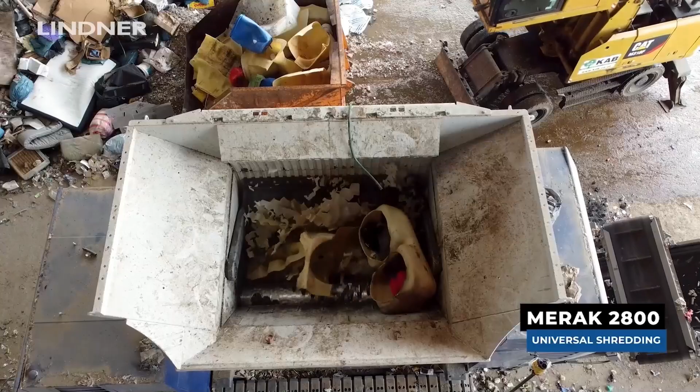What you saw here is our core competence. We are a producer of shredders and complete shredding systems. The company is based in Austria. We produce all our equipment in Austria in 2 facilities. At the moment, we have more than 400 employees worldwide working for us, with several branches also worldwide.

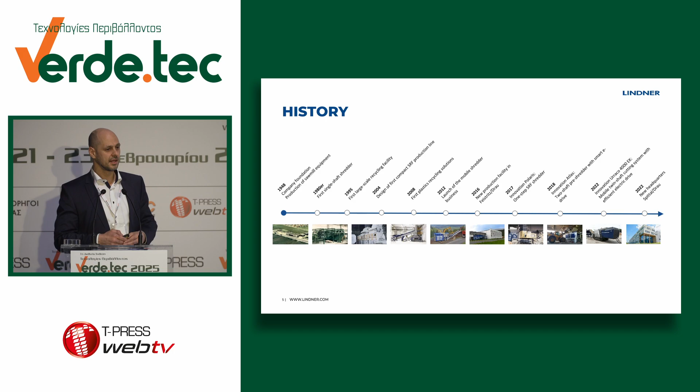We started almost 80 years ago in the wood business. And then we saw in the late 90s that there is a market for waste products, particularly shredders. So that's where we started with our first machine, around 25, 30 years ago. Then we developed also the market in terms of plastic and waste. Now we have several branches, as said, worldwide, where you can see in the US, Europe, of course, and also in Asia. Our vision is, just to summarize it, take the waste and transform it into a valuable fraction.

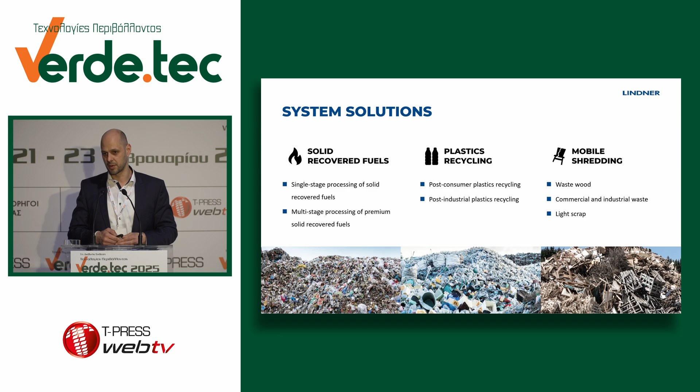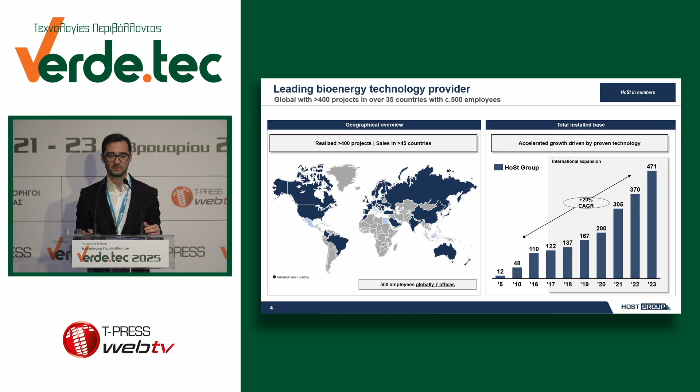The other majority of employees are located in Poland, where we have our manufacturing site. All our equipment is made there, and this helps us always give the best solution on the market. We can monitor all steps of the process and test the machines before delivery on site.

Here we manufacture all the containers, all the skids, all the fabricated piping. We test them and ship globally, from North America, South America, to Australia or Japan, and of course Europe.

This is an overview of the products we have. So as I said, with the brand Bright, we supply the biogas upgrading unit, CO2 liquefaction unit, bio-LNG of course, and CO2 flue gas capture.

This solution is with a specific technology. And in the end, with the brand HyGear, we have the containerized solution for hydrogen production with steam methane reformer or electrolyzer. With the brand Host, we have the anaerobic digestion plant and the biomass waste combustion plants.

As I said, we always have the control room in Enschede for service and maintenance, and local teams for each different country, because although we can monitor everything from there, it's important to have a local presence for maintenance and for relationships with clients.

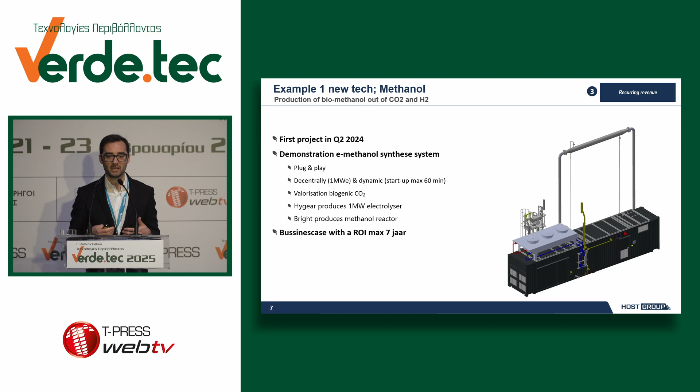For example, this is an innovative solution where we see cooperation between Bright's CO2 recovery units, so we can recover CO2 from the biogas or from flue gases, and mix it with hydrogen produced from an electrolyzer by HyGear to produce another biofuel, methanol, which we see a lot of application for as naval fuel. This is the last slide.

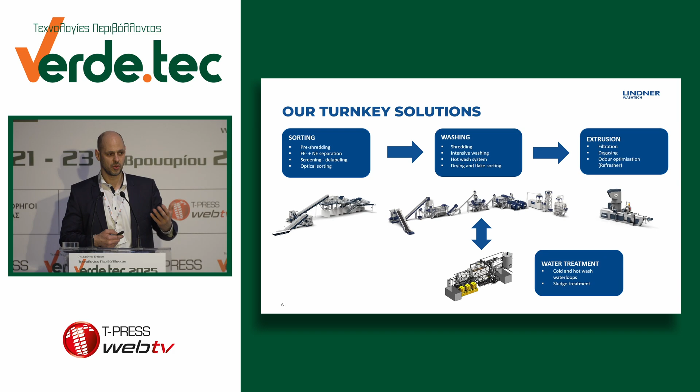And then we go into the shredding, washing, drying, and afterwards we have the extrusion. The water treatment, we have our own partner. There are two ways to use the water - we can use a cold or hot wash system, depending on the requirements.

Now I'm showing you some installations. Important to tell you is that we are active in the post-consumer field. That means the fractions you can see here, we are able to treat, and mostly these fractions are contaminated. So that means HDPE, LDPE, PP packaging, and also PET.

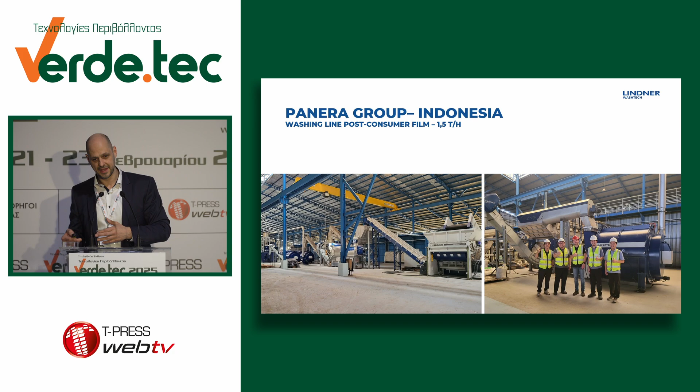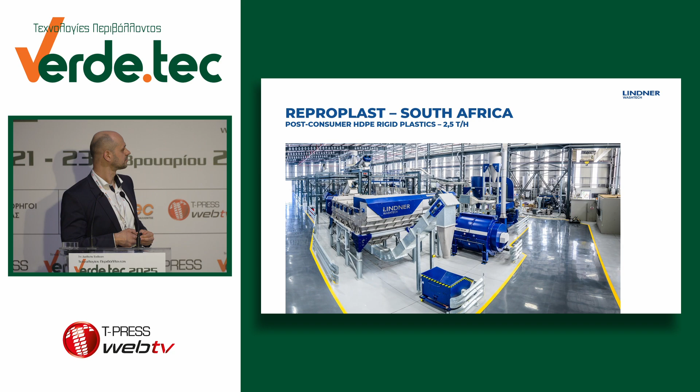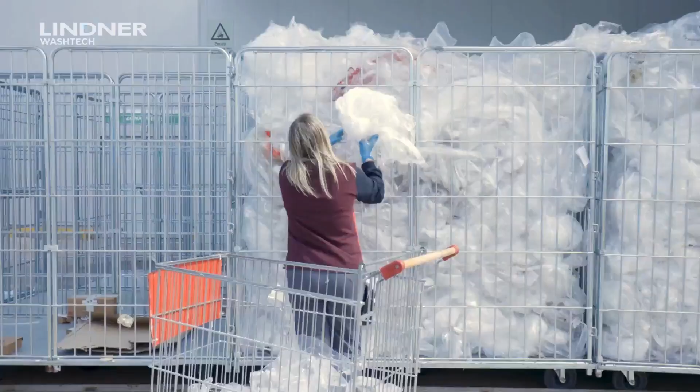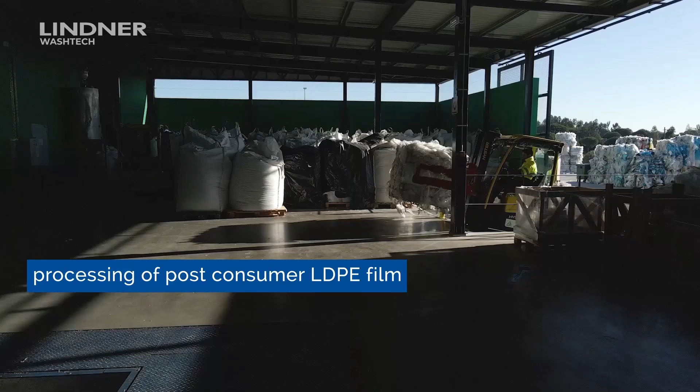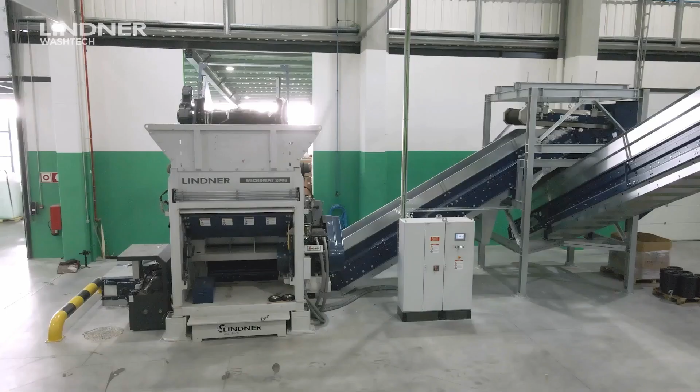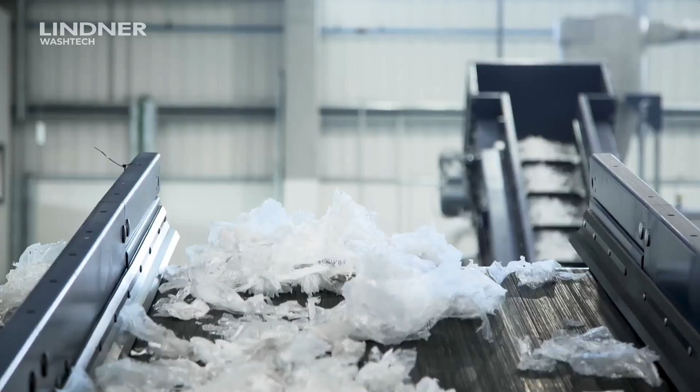So this is a typical film application. The bales can be opened manually as well as with equipment - this depends. Here is then the shredding. Optional, you can use a ballistic separating system. This is fine shredding, and after fine shredding we go into washing. So it's around 20 millimeters, the flakes, and then we dry them - first mechanical and then thermal.

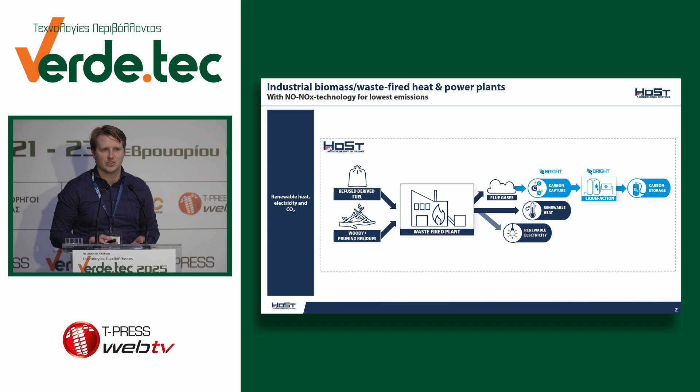So as Host Thermal Technology, what are the products that we are working on? We have combined heat and power plants, hot water boilers, and steam boilers, and finally carbon capture technology that we can place alongside those boiler plants.

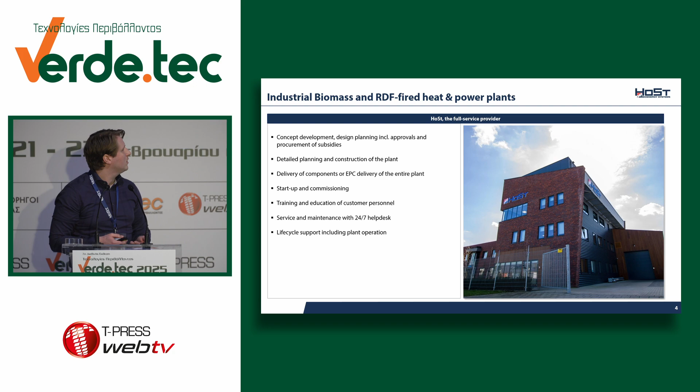And what do we do as Host Thermal Technology in those projects? We can develop the project from beginning to end. So we can help with the concept development, the conceptual design, help with permitting and subsidies. Thereafter, we help with the detailed planning of the project. We deliver the components, or we can do full EPC contract of the energy plant. We help with startup and commissioning, and of course we train the personnel of the customer, the operators.

Thereafter, when the project is finished, we do maintenance contracts of several degrees, from only a help desk on distance up to a full maintenance contract where we do all the plant maintenance. And finally, we can do life cycle support and eventually the complete operation of the plant.

So starting with our first product, it's biomass-fired hot water boilers. These obviously produce hot water. Our product ranges from 8 megawatts thermal to 20 megawatts thermal, with hot water properties up to 16 bar and 170 degrees Celsius.

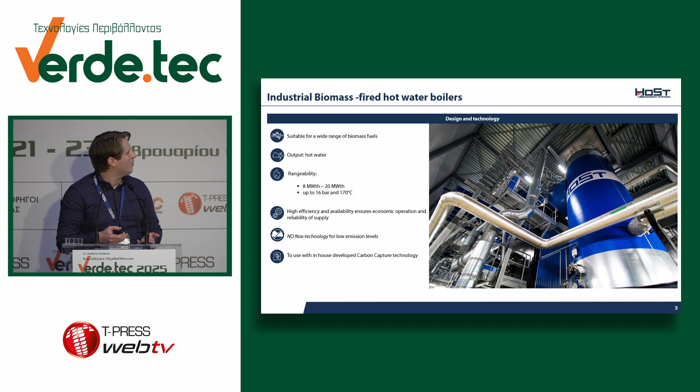Our thermal technology plants are characterized by a very high availability, a robust design, and high efficiency. We use no-NOx technologies to prevent the emission of nitrogen oxides. It starts with good combustion to prevent nitrogen oxides from being formed, and thereafter we use SNCR, non-catalytic methods, as well as catalytic methods to reduce the nitrogen oxides in the flue gas.

Then to the steam boiler plants. Our steam boiler plants are applicable for a wide range of fuels, not only biomass fuels but also RDF fuels - RDF being a fuel derived from waste. These boiler plants range from 8 megawatts up to 25 megawatts and produce steam up to 90 bar and 480 degrees Celsius.

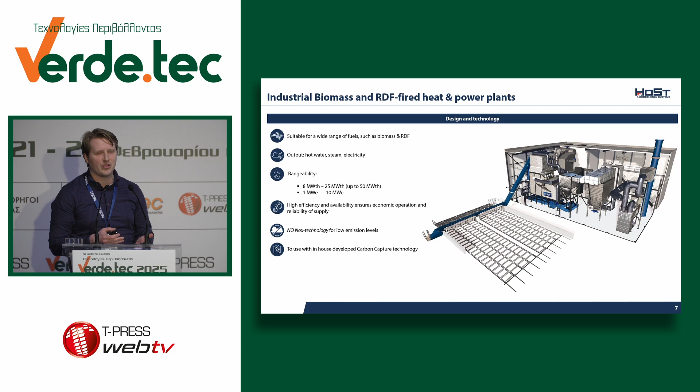And then finally, the combined heat and power plants have the same range as our steam boiler plants. But in this case, the steam boiler plant is expanded with a turbine and condenser system, and it supplies electricity and/or steam and/or hot water. With this configuration, we can produce between 1 megawatt and 10 megawatts of electricity typically.

So our design, as I already mentioned, has the lowest emissions in the industry. That's because we are a Dutch company - we did a lot of projects in the Netherlands, which has one of the most stringent emission limits in the world. We can achieve very high efficiencies, up to 130% in combination with the flue gas condenser. And as I said, it's very high availability, guaranteed higher than 8,500 hours per year. In one of our own plants in the Netherlands, we even ran for 40 months straight without stopping the plant.

We design our plant as if we would operate it ourselves. In fact, we do operate the plants. We have two of our own combustion plants in the Netherlands, and we get continuous feedback from the operators to optimize our design.

So our plant is designed for the best return on investment, so we have low operational costs, and also because we built our design such that we can have low civil costs. The foundation loads are spread out over a larger area, and the building height is kept very low, which is also advantageous for the permitting process.

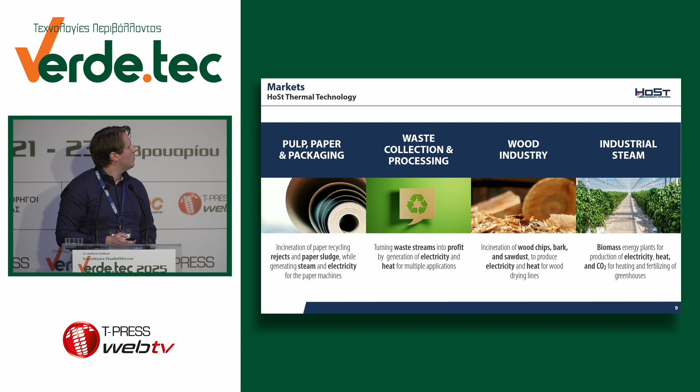After the waste is sorted and all the recyclable materials are extracted, there's always a stream that cannot be recycled, and these streams are very suitable for the final process, which is thermal treatment or converting it into energy. The wood industry is a very interesting one, where there's wood waste available and they need heat for the drying of the wood, and industrial heat, for example chemical processes, but also horticulture, where the heat is used in greenhouses. So then to highlight some of our projects.

This reject is not suitable for the paper, mainly containing plastics, fibers, fabrics, and this is converted into an RDF. We combine it with paper sludge from the water treatment of the paper plant and some waste wood, and this is converted into steam of 50 bars and 410 degrees Celsius. This steam is used to drive a turbine producing 1.7 megawatt electricity, or 1.8, I'm sorry.

During performance testing we even got 1.9. The exhaust steam from the turbine is supplied to the paper process. They use it to reduce the natural gas consumption of the paper mill by 50%. So our plant supplies half of the energy demand of the paper mill.

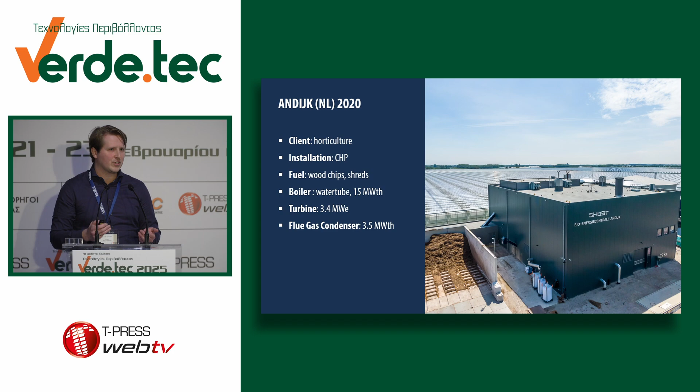The nice thing about these plants that we own and operate is that we also use them as testing facilities for R&D. So we test new technologies, we test new fuels. If there is a fuel that we don't have experience with yet, we can test them in our own facility.

So, 10 advantages of working with Host. First of all, Host is a family-owned business since 1991, still in the family. The founder of the company has transferred the responsibility to his son, I think now 4 or 5 years ago. It's a very economically stable company.

We have 30 years of international experience, and we are highly focused on innovations. As my colleague Alessandro already pointed out, we're continuously developing new products that are demanded by the market. We have over 50% college-schooled engineers, so we are really focused on the engineering.

We have in-house knowledge and designs for our equipment. We have our own site managers, commissioning and maintenance support staff. And as we already pointed out, we have our own plants where we can get continuous feedback for improvements. We have great experience with difficult fuels, and the Host concept is a good combination of good price, good availability, and good lifetime, full lifetime cycle.

So thank you for your attention.

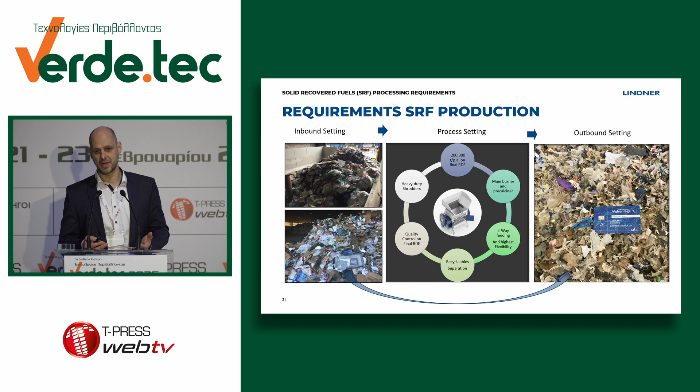Just as an example, this is an installation in Germany where they do sorting already in the inbound setting. What you can see here is a kind of bunker system with different qualities, so they get different kinds of waste. It makes a difference whether you have pure MSW or what we call C&I waste, the quality, meaning the calorific value, is different.

Here you can see they analyze the material. Green is a better quality, red is a lower quality. When they mix the material in the beginning, they influence what they get out at the end.

When it comes to turning the waste into the fuel, into the RDF, we as an equipment manufacturer face some challenges. One challenge is treating MSW organics. Organics are wet, and that's mostly not wanted in a combustion process. It influences the quality.

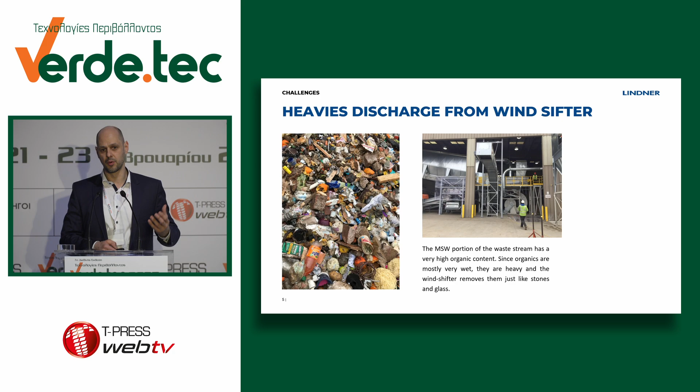There are two main ways to get rid of the organics. One, we use a wind sifter to get them out. In addition, we might use screening technology to remove the organics, and then the organics can be used in compost plants, for example. With the wind sifting, we also remove inerts, meaning glass and stones.

Another challenge we face are metals. As you know, very often in the bins it's contaminated with pieces of metal, so our task is also to get rid of the metals before producing the final fuel. So how do we do this?

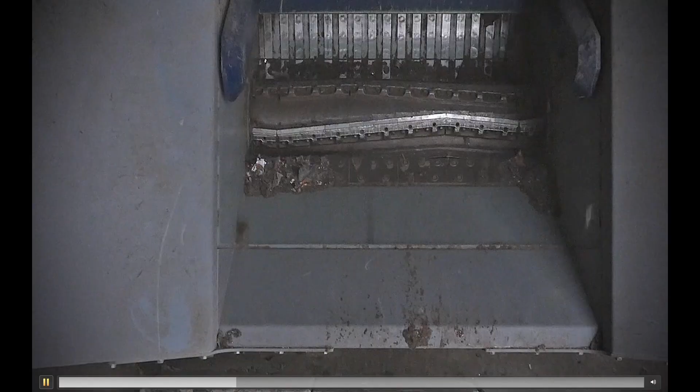This could be the primary shredder, where you put in the waste. We show you, okay, that's a big piece of metal. If the shredder is not able to crack the piece of metal, it stops, so we stop and remove it out of the whole process.

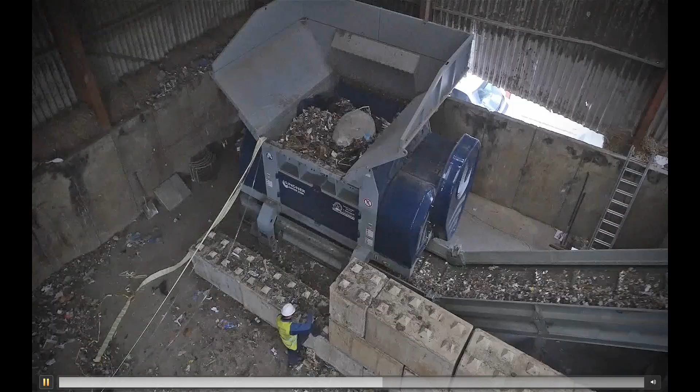Now with the waste - you see the belt? Stopped. We open again a little bit.

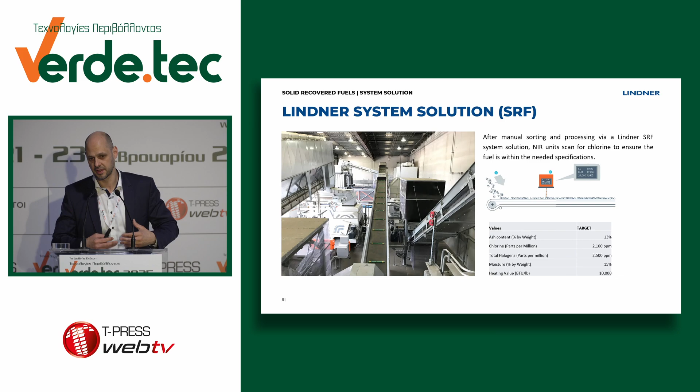So what can be measured? The ash content, the chlorine of course - this is very important for the cement industry because they would like to keep it as low as possible - the halogens, the moisture, and at the end you see the British measurement, that would be around 20 megajoule, the calorific value. This is after fine shredding, you see it's 30 millimeter. This is typical main burner quality for the cement industry, and you see how the quality will be measured.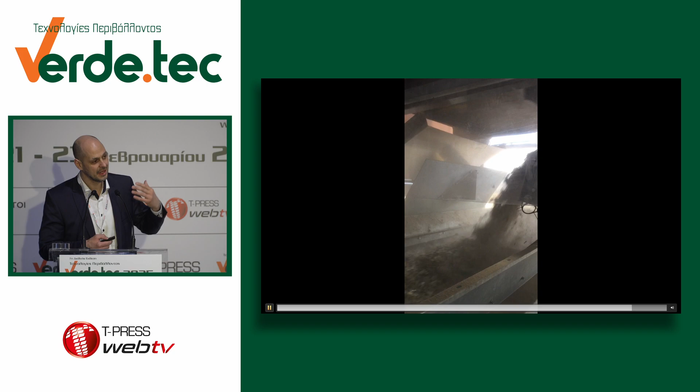So therefore, the guy who sits on the wheel loader and puts material into the first shredder can influence the numbers very strongly. He can influence the moisture, etc., and therefore also the quality.

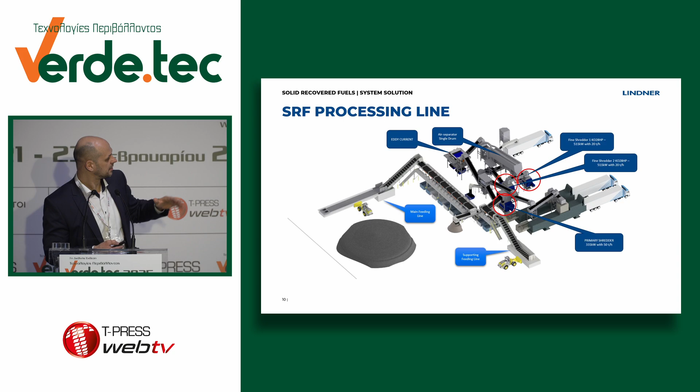This is a bigger RDF line capable of producing around 150,000 tons of final RDF. We have here two feeding systems with manual sorting. Then we go into primary shredding. After primary shredding, we remove the ferrous with magnets, then we go to the eddy current to remove the non-ferrous fraction. We go to the wind sifter to remove the organics and the inert material, and then what's left is mainly plastic and paper. We put it into fine shredders and go down to 30 millimeter. Optionally, at the end there are press containers, or they just put it directly to a bunker.

Here's the flow sheet - in this case, depending on the material, the amount of recyclables. So this was a typical installation to produce high quality fuel, around more than 20 megajoule.

This is an installation we use in Poland to produce RDF for a CHP, a combined heat and power plant. There you can see we have only the shredder. The input material is MSW screened already from sorting lines, so we have the shredder and go down in one step directly to 80 millimeter.

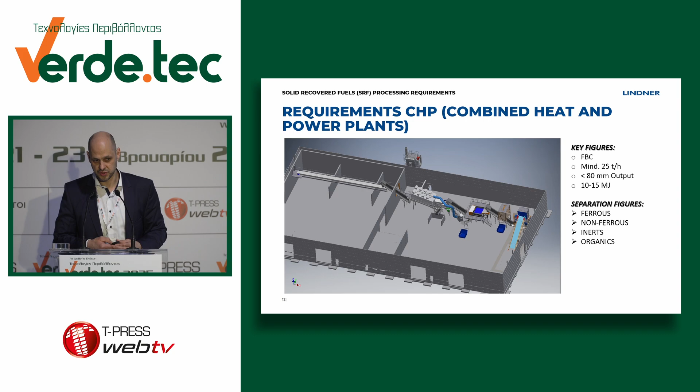We have the magnet to remove the ferrous material, the eddy current to remove the non-ferrous, the wind sifter to remove the stones, and then what's left is the final fuel that they bring to the boiler.

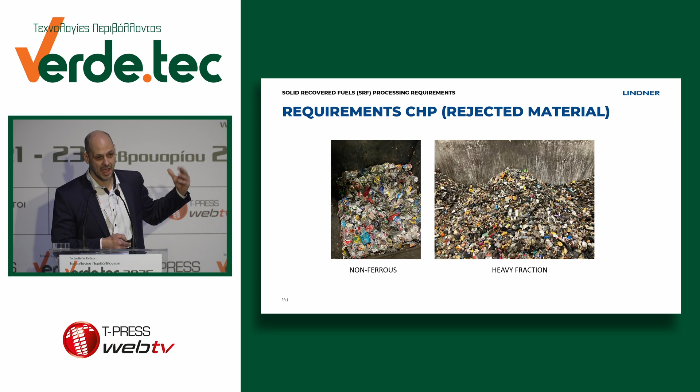There is a debate on the market: what is better, more shredders or one shredder? I would say it depends on the requirements. All systems have advantages and disadvantages. Where higher quality and higher amounts are needed, more equipment is needed, so the investment is higher. Where lower quality is needed, for example for a combustion system, working with just one shredder and one magnet could be sufficient, depending also on the original source of waste.

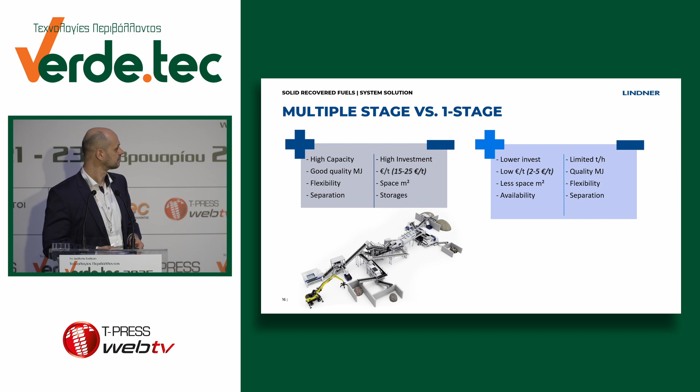So this here, on the left side, is multiple stage shredding, and here, single stage shredding. So a small fraction can be produced also with one shredder. Thank you.

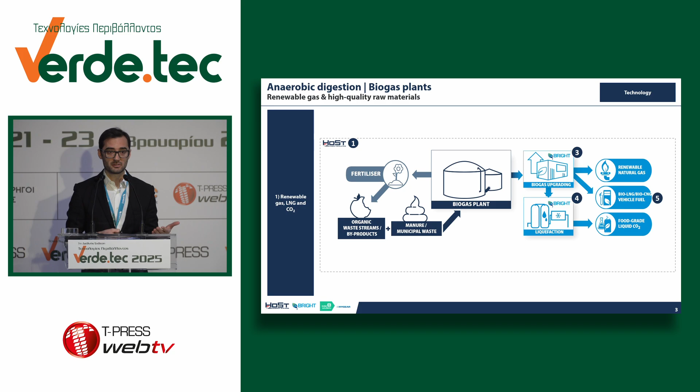We are the only company in the market that can include in our framework with Host the entire equipment and process for anaerobic production and biogas/biomethane upgrading. So after the biogas, inside the scope of supply of Host, there is the upgrading product: the CO2 liquefaction unit, and LNG or whatever application is needed. This is important because it's easier for the client to have only one contact point, since it's Host for all the plants, so construction can proceed smoothly. Also, during operation, the control systems of the two main units, the upgrading and the anaerobic digestion, are supplied by the same company, so they can communicate with each other, exchange signals and emergencies, so the plants can really operate greatly.

This is not a typical installation, it's just an example of the equipment we can supply. I don't want to say this is typical because it's impossible to have two anaerobic digestion plants equal to each other. An anaerobic digestion plant, a biogas plant, is always a tailor-made project.

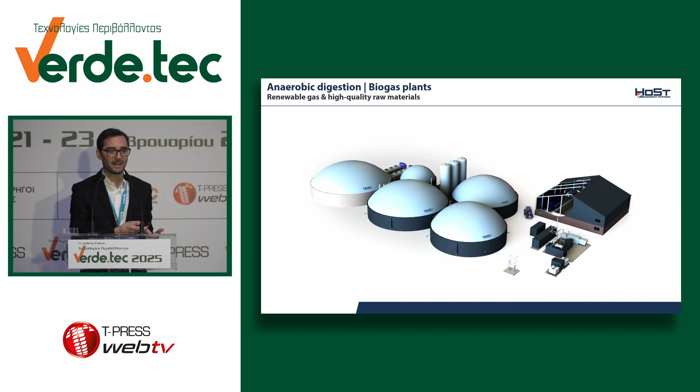In fact, the first step is a kind of dialogue between the company and the client to understand which material the client has, what are the necessities of the territory and area, and what is the final application of the biogas. So we can supply different solutions, different sizes of tanks, different kinds of gas holders, the upgrading, different solutions for digestate management, different kinds of feeding systems, and also pretreatment based on the client's feeding material.

At the moment, we have more than 100 plants in operation. As I said in the first presentation, we started our experience in the 90s with anaerobic digestion plants, so we have great know-how and experience. We have faced different kinds of biomasses, starting from sludges, food waste, industrial waste, and many materials coming from the agricultural sector, like agricultural waste, manure from cows, pigs, chickens. This means we have direct experience with different problematics, like H2S production, nitrogen content, acidity, and different necessities, for example, for the mixing systems.

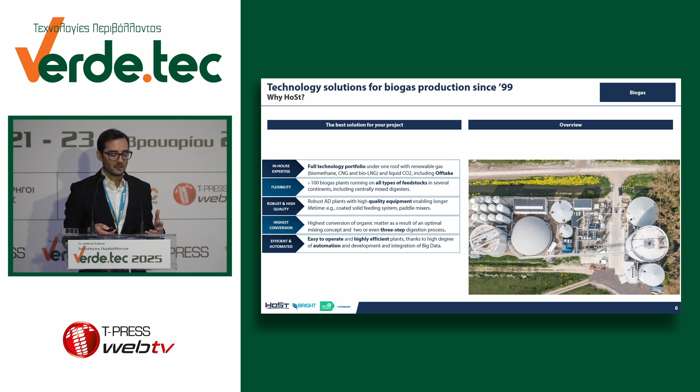As my colleague said before, we are very focused on R&D. We are always trying to offer clients new solutions, but not only to clients, also to ourselves. These are our plants, so we are on the first line to have maximum availability, maximum biogas production, and maximum revenue from a plant. If you come here, you can always see something new. I was there two weeks ago, and for example, we are testing our ammonia removal from the biogas before the upgrading unit.

This is one example of what we can do. This is the service we can give as HoSt. As I said, it's a dialogue with the client, and we can define together the scope of supply. We can start from preliminary design and go all the way up to EPC contractor, turnkey solution, so we can include everything in our scope of supply.

In the middle, you can see there are different solutions. We can only supply the main equipment, like the mixer or the feeding system, or we can go deeper into details. As I said, we decide together with the client and based on the local situation which is the best solution for them. The starting point, of course, is to define the menu, the diet of the digester, so which material goes inside, and it's important to have a big database of information.

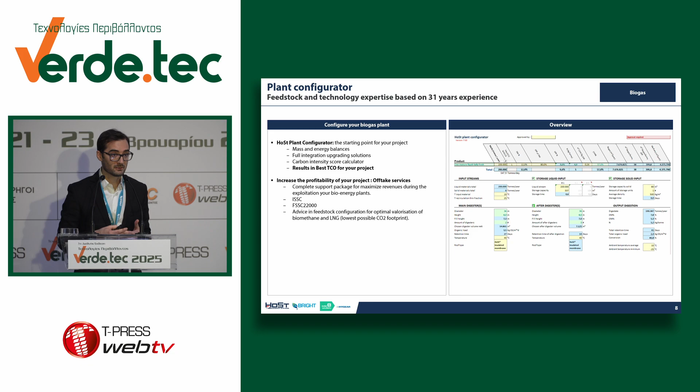As I said, we have 30 years of experience, so we work with practically all the materials that you can put inside a biogas plant. We also have a test facility, so we really know the biogas yield production. These are some solutions from our R&D department, for example to insulate the anaerobic digestion part, or the modeling for the mixing inside the digesters.

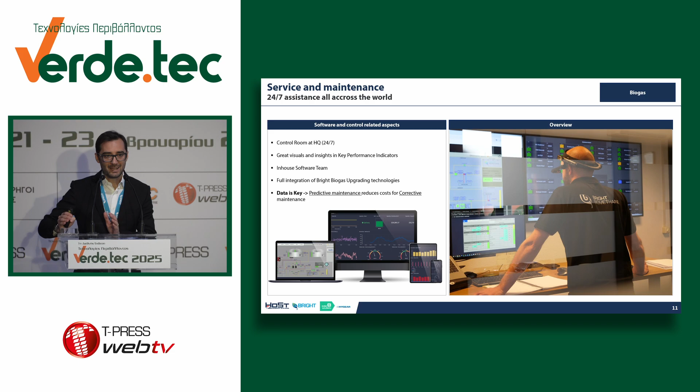Service and maintenance, as I said, is very, very important. I'm stressing these two points, R&D and service and maintenance, because in my opinion these are the key to creating a relation with the customer, to always supply new solutions and to give assistance during the entire lifetime of the plant.

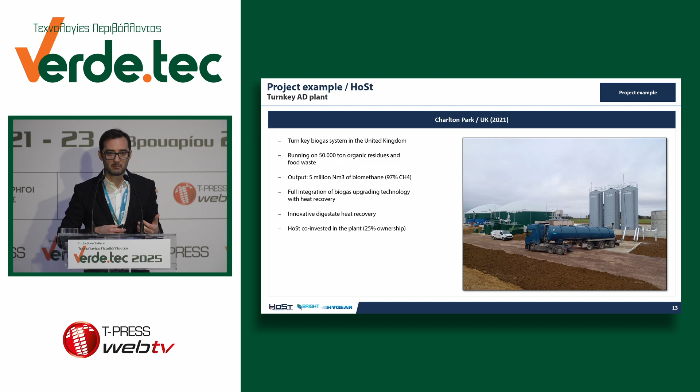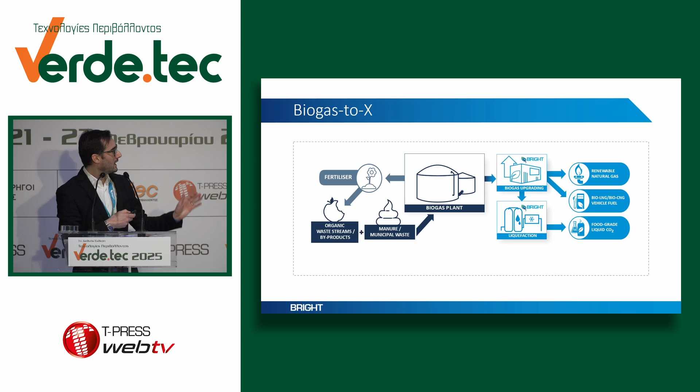I can jump this slide, this is the introduction of the company. I think you already know that Bright is part of HoSt Group. Now we stay focused on the right part of the anaerobic digestion plant.

As we said, biomethane is very important in the energy transition. We introduced this technology more than 15 years ago, and we realized the first plant in Netherlands. Inside the group, as I told before, we have different divisions, so we know different technologies.

For the upgrading of the biogas, on the market you can find PSA, you can find amine scrubber, and you can find membrane. Inside the group, we know all three of these technologies, and we applied them in different sectors. For example, the amine scrubber is applied for carbon capture, PSA for hydrogen purification, and at the end for biomethane, we selected membrane solution because it's the best solution for the upgrading of the biogas in terms of recovery rate, biomethane quality, and OPEX of the plant.

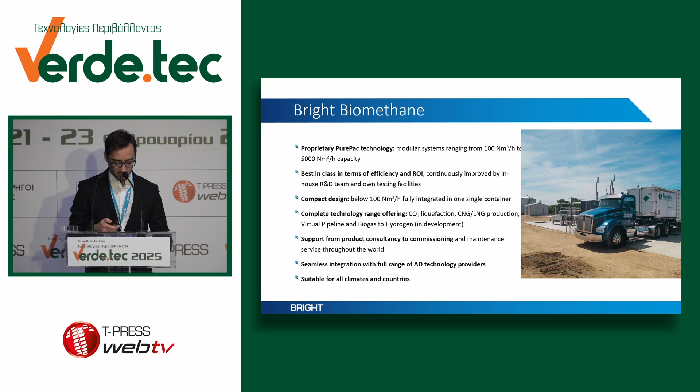We have a different range of solutions. Now let's take a look at the process. This is a more standard product than an anaerobic digestion plant, even if we always have a pretreatment of the biogas that will be designed case by case.

The biogas main composition is CO2 and CH4, but you can also find other pollutants like VOC, H2S, and of course moisture coming from the digester. So the first step is to remove these pollutants. We typically have 2 or 3 stages with activated carbon to remove the H2S and the VOCs. This is an OPEX on the plant.

Then we have a dryer to dry the biogas. When we have this clean biogas, mainly CO2 and CH4, it goes to a compressor that increases the pressure up to 16 bars. This is our standard design, but on this point we can play a little bit based on the necessity of the clients in terms of OPEX, or eventually in terms of the grid network. For example, in Spain the grid is at 70 bars, so we can increase our operating pressure a little to avoid installing a booster compressor after the upgrading.

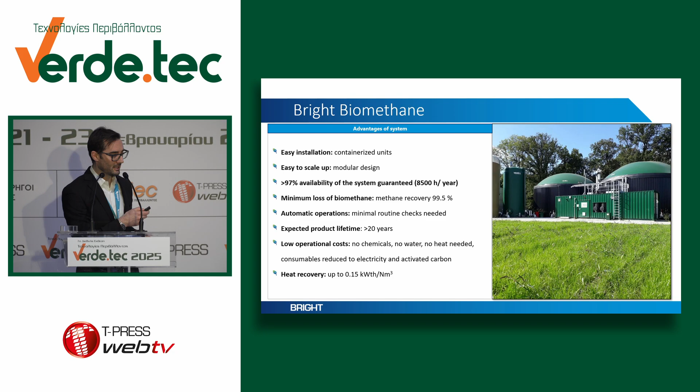It's quite simple how it works: we collect the CO2 coming from the upgrading, we clean it a little bit from moisture, and then we increase the pressure and go through the cooling steps, where the CO2 is converted from gas to liquid.

One of the main characteristics of our plants: first of all, this is not a rescaled industrial CO2 liquefaction plant. It is designed specifically for these sizes, connected with the upgrading, so for each size of upgrading we have the related size of CO2 liquefaction unit. The idea is always the same, so fully containerized. We would like to reduce as much as possible the site activities, because that costs and can cause problems. We produce also these units in our facility. We test them before shipping to the clients.

The other characteristic is that in the refrigeration circuits we use CO2 as refrigerant fluid. So instead of freon, ammonia, or other hydrofluorocarbons, we use CO2, which is more secure in terms of safety for the operators, and has less impact on the environment.

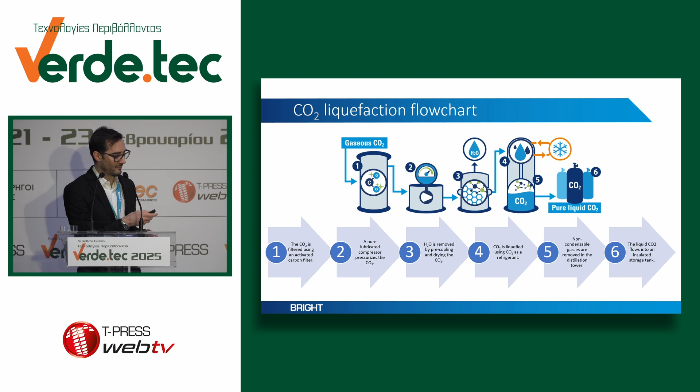This is the size. Jumping directly to the bio-LNG: as I said, we have also a solution for bio-LNG that can be connected to our system, so after the upgrading we can go to the LNG solution.

Also here we can recover the CO2. I didn't mention this: when you recover the CO2, we can recover also the 0.5% of methane that you have in the off-gas. So we can recirculate it to the upgrading, and the upgrading can in the end reach around 100% recovery rate.

Let me show some case studies, it's always interesting to see some installations. This one is an installation in the Netherlands, a wastewater treatment plant of 1,400 cubes of biogas. You can see on the back, on the right, the upgrading unit. The container here, and on the left, is the CO2 liquefaction unit. And the big vertical tank is the storage tank, because we have to store the liquid CO2 before the off-taker comes to collect it.

The final use of CO2 can be in different sectors, but the main sector of course is the food industry, for different applications. The CO2 purity is 99.9. The difference between industrial and food grade is only in the analysis. This plant is always the same, because when it's liquid, the CO2 is practically pure. What we have to do is the analysis to certify that it is applicable and usable in the food industries.

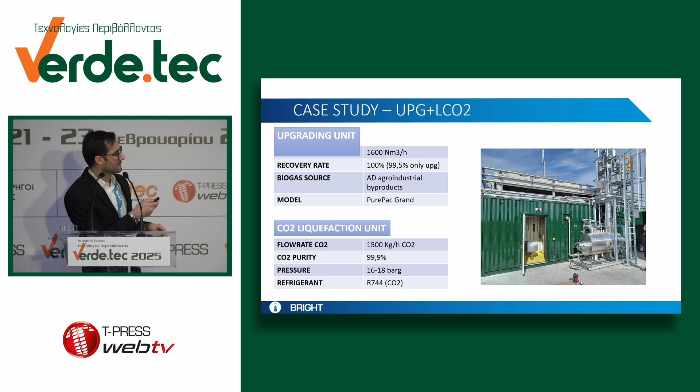Last slide, then I'll leave the stage for the other presentation. This is the biggest plant, for biogas coming from anaerobic digestion of manure and agricultural byproducts. As I said, for each size of the upgrading unit, we have the relevant equivalent CO2 liquefaction unit. Last thing I'd like to say: it's always important that we invite clients to visit our office in Enschede, because it's important to meet the management, understand how we approach clients, how we think about projects, and of course visit some site installations. This way you can touch with your hands how it works and the quality of the products. Thank you so much.

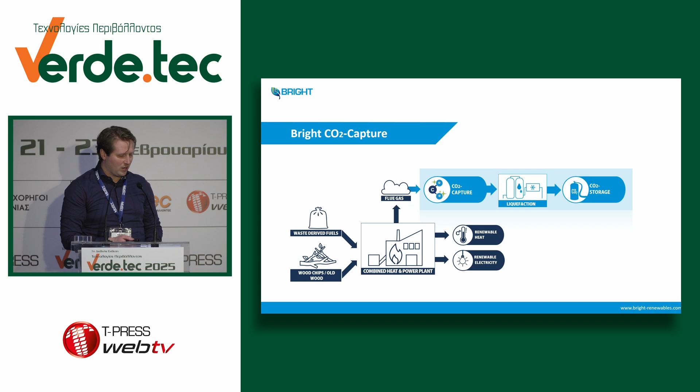We sell CO2 capture technology and CO2 liquefaction technology as separate modules. With only the carbon capture technology, we can separate CO2 from the flue gas and reach about 97% pure CO2, capturing about 85% of the total CO2 from the flue gas. When placing a CO2 liquefaction plant downstream of the CO2 capture plant, we can purify the CO2 even further, to 99.9%, reaching food grade quality, which means the CO2 can be used in the food industry.

And finally, we also have systems for CO2 capture storage. The CO2 capture technology comes in four different sizes: we have the mini systems, which contain only one container, and it scales up to the grand system, which is two containers, and also the amine scrubbers.

What I forgot to mention earlier is that our carbon capture technology is standardized modules, and the process equipment is placed inside certified shipping containers. They are assembled in our factory in Poland, and they are transported to site in a shipping container where they are placed on site directly.

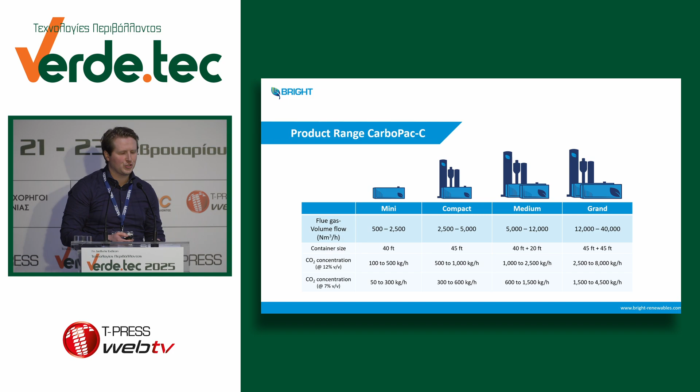We have two technologies for carbon capture. The most economically viable one is the amine-based absorption process, and that's what this presentation is about. Besides that, we have a second technology, vacuum swing adsorption, which is still more in development, and we build it at pilot plants.

About the amine absorption technology: when we have the flue gas from a combustion process, it's typically still at a relatively high temperature, 150 to 200 degrees Celsius. So what needs to be done first is to cool it down. We use a flue gas condenser to cool the flue gases down to at least a condensing point, about 50 degrees Celsius. But the lower the temperature, the more efficient the carbon capture will be, so ideally we reach 30 or 40 degrees Celsius of flue gas.

Then first, at low temperature, the flue gas enters the first amine column, where at low temperature amine absorbs CO2. The CO2-lean flue gas leaves the column at the top, while the CO2-rich amine is pumped to a second column where it is heated. At high temperature, the amine solution releases the CO2 again, so then we have CO2 in pure form. After that, the CO2 liquefaction module can be placed to further purify the CO2.

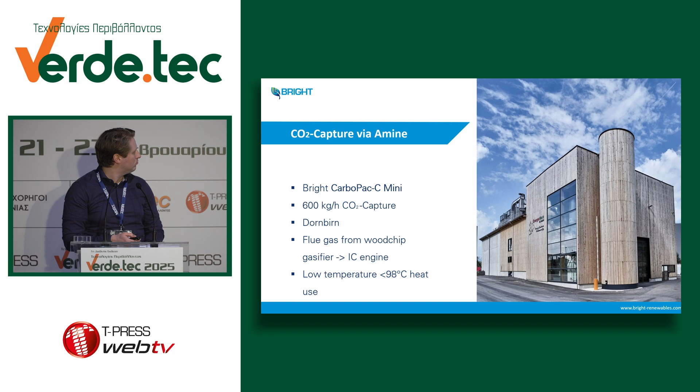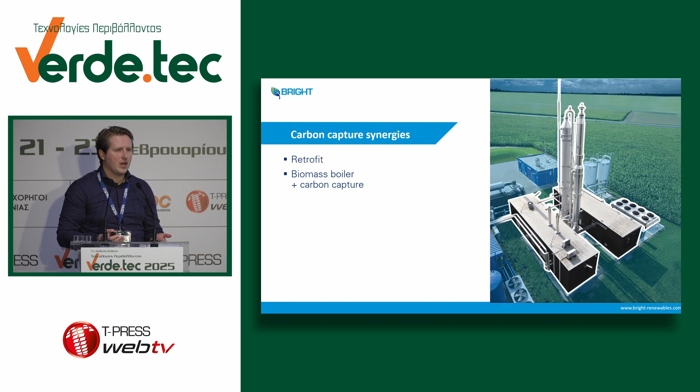So, project opportunities for CO2 capture systems: as HoSt Group or as Bright Renewables, we can do retrofit of existing boiler plants. Any existing boiler plant, we can place a carbon capture system, even if it's a competitive boiler plant built by a competitor of Host. Secondly, we can supply together with the Host thermal technology division a complete bioenergy or waste-to-energy plant, including a carbon capture system.

So now I have explained how we capture CO2 from flue gases, and you wonder, what can I do with the CO2? First of all, when combined with a liquefaction plant, we have food-grade CO2. It can be used in the food and beverage industry, for carbonated drinks, but also packaging of food as an inert gas to avoid spoilage. It can be used in greenhouses as a fertilizer for plants, and lastly, it can be used as a refrigerant.

We also use CO2 as a refrigerant in our own liquefaction plants. And especially biogenic CO2 can be used in e-fuels. It can be used to reduce the carbon footprint or scope 1 emissions of a factory, and it can be used when you use carbon capture and storage, as negative emissions in voluntary trading.

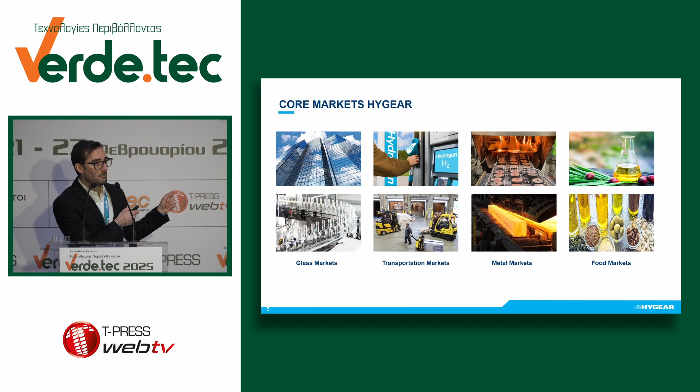These are some of our clients, and some applications of hydrogen connected to installations we made. As I said, our containerized solution has a limited capacity of hydrogen, but of course you can install more units in parallel to reach the necessity of the clients.

We have other products connected to hydrogen production, for example the Hy.REC. This is very nice, applicable in industries that have atmospheres where they use hydrogen. When this atmosphere is wasted into the air, with the Hy.REC you can recover part of that hydrogen, reducing the amount of new hydrogen you need in your process.

Of course, Hy.PURE and the Hy.OXO are applicable where you need high purity hydrogen, for example for fuel cell applications. Last but not least, with the steam methane reformer, during the reforming process of CH4 you have hydrogen on one side and CO2 on the other. As you know, we are experts in CO2 recovery, and we can do it also in this part.

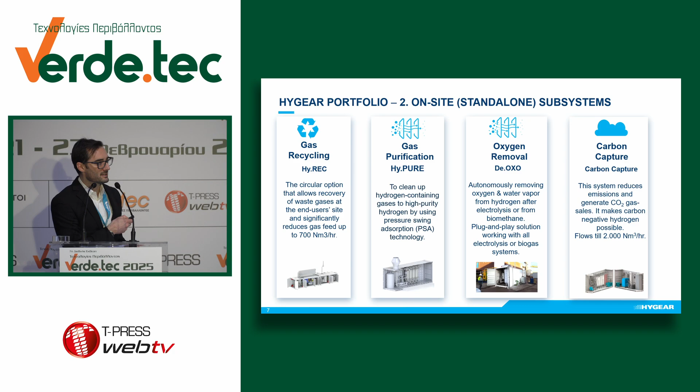We make these containers in Poland, the same facility we share with the other products of the group. Okay, these are some applications.

Jumping to this one - a nice example at Walmart. In the warehouse of Walmart, they decided to use forklifts with fuel cells instead of electrical forklifts that take a long time for a full recharge. They installed this unit to produce local hydrogen with a refueling station also.

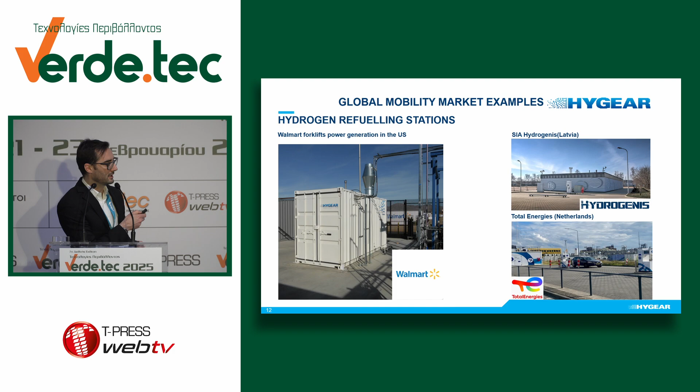The refueling station on the right, with Total Energies, is in front of the office of HyGear. So HyGear has its own production of hydrogen and sells it directly on the market with this station for cars in the Netherlands. Another application of hydrogen is hydrogenation of oils.

I think we can close the presentation. Anyway, if you have any further questions, we are here all day long. Thank you so much.